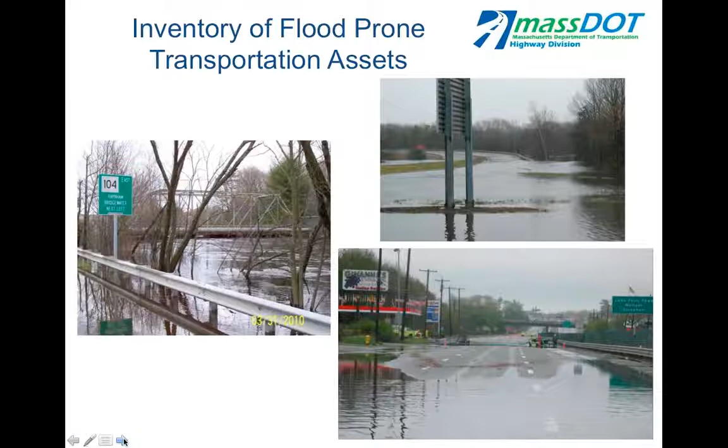So we felt like this was a good chance to look at - if it's flooding today, let's inventory it, it's likely it's going to flood tomorrow. So we started that process, and we did a series of surveys. We created the Inventory of Flood-Prone Transportation Assets. It took a number of surveys, and what we finally realized is we needed to go out and talk to people - everybody was too busy to really respond to these surveys in detail.

Actually, the surveys found that where the latest storms were, that's where we got the best results. So if the storm was in Eastern Mass, we got really good input from there. But this is something that, as a state agency, you can easily put together.

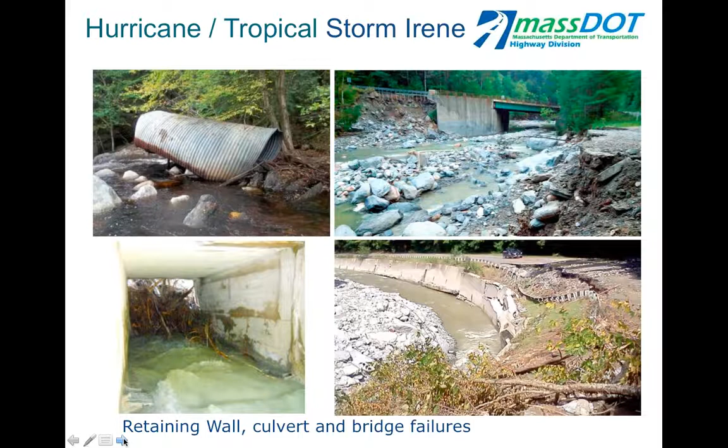When we were in the middle of that inventory, we were hit by Tropical Storm Irene, which found us in Western Mass. It very severely affected other states, especially Vermont, which had Hurricane Irene and Lee, but we were affected too, and our Route 2, a major east-west roadway, was completely taken out.

So we were in the middle of these surveys, we decided to go out again and talk to our folks in person, and we expanded our mapping to over 300 locations where there's a regular past history of flooding. Here's another shot of some of the damage from landslides.

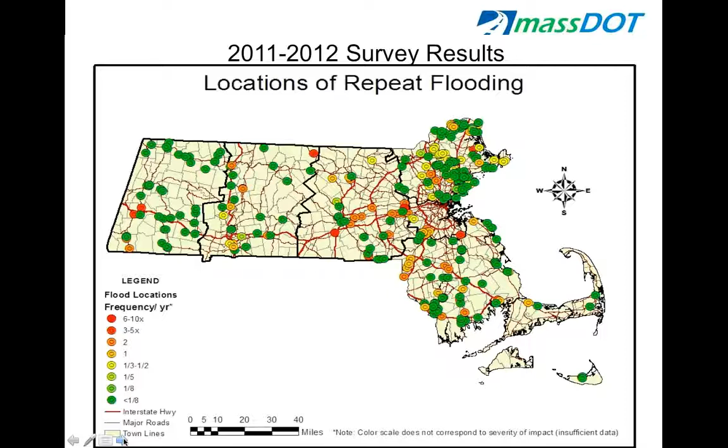This is the map we created. What's interesting is, one, by color coding, you can tell the number of times a structure or roadway floods in any given year. You can zoom in on this GIS layer, and when we went out to each district, we went over every single one of these points with all the maintenance, construction, and operations folks, and they knew every single location, how severe the flooding was, how frequent it was, how long it lasted, and in most cases, why it was flooding.

So it became a very good resource for us, and we now use that as we're screening projects with the approach that let's not miss any opportunities to make our system more resilient and minimize risk in the future. So let's make sure that if we are building a project, we're addressing the issue to the extent that we can.

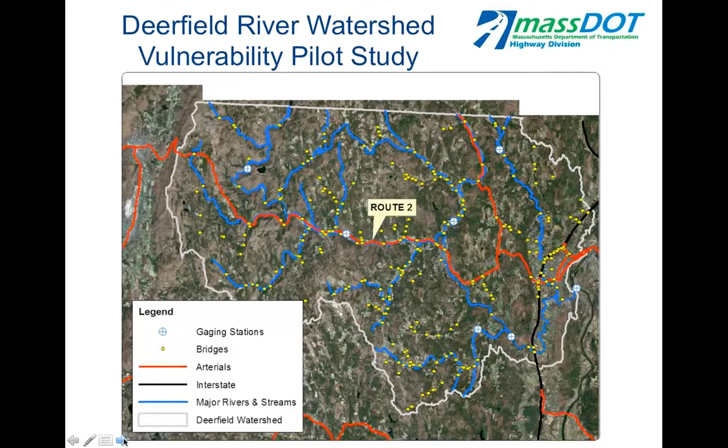The next project was the Deerfield River Watershed Vulnerability Pilot. We're about to start this. We've negotiated a contract, and we're going to develop a fluvial geomorphology model, essentially a model that will show the effects of a stream within the embankments and along the length of the watershed. So you're not just looking at one particular location, you're looking at multiple locations.

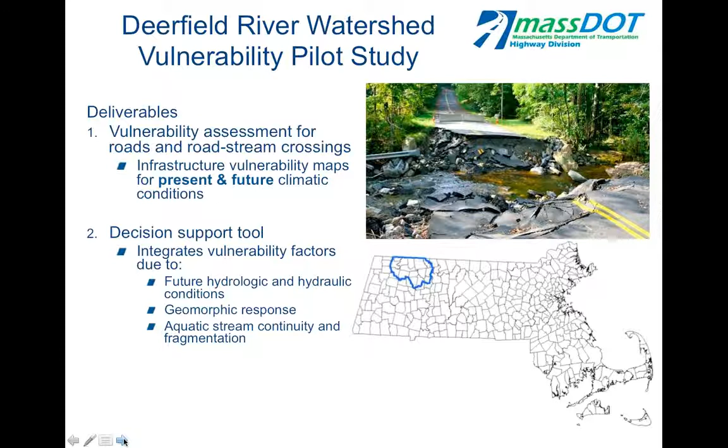Using that model, we'll be able to assess all those roadway and stream crossing locations, including climate change, into those predictions, and then assess them with this decision support tool. So you'll be able to tell, if we increase the size of this culvert, what effect will it have downstream and upstream? Is this a good investment? Is this something we should be doing? We're hoping to have that done in two years, and we're about to start that project.

And the final project I'm going to touch on today is our most sophisticated project, the MassDOT Federal Highway Pilot Project.

We were in the second round of pilot projects that Federal Highway funded. We're looking at climate change and extreme weather vulnerability to the Central Artery project. We spent a lot of money building the Central Artery. It's a critical resource to the city of Boston, and we want to make sure it's not vulnerable to extreme weather.

I've listed a few people here, including myself, but I want to point out Steve Miller is the project manager. He works in my section, and he's working with Catherine MacArthur as the assistant project manager. Our team is made up of the University of Massachusetts, including Ellen Douglas at UMass Boston, Paul Kirshen at University of New Hampshire, and Kirk Bosma from Woods Hole Group, who's doing all of the sophisticated modeling we're working on.

I like to show this picture because I like it better than a locus map, since it shows the area that used to be the Central Artery. The Central Artery is now underground, but this area right in the center, where there's some green space and roadways, that's parkland.

There used to be a big green, rusty, elevated structure there, a viaduct that went through the city. It was in gridlock a good part of the day. That's now gone. The I-93 has been moved below ground, which, as you can see here, also means it's below sea level.

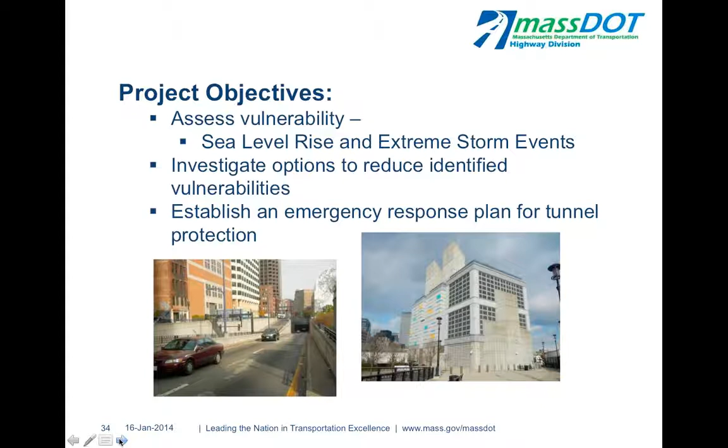The Central Artery is a critical link to the area, both the regional transportation network and to the city of Boston. It's an important economic engine, and it's a major emergency response route. By lowering this into the ground below sea level, it has revitalized the waterfront of Boston. It's been a huge economic boom, and it's an important resource.

Our project objectives were to assess the vulnerability of sea level rise and extreme storm events to the Central Artery, and look at ways we can reduce those risks and establish an emergency response plan for the tunnel, which might include, for instance, as a hurricane approaches, you might need to close down the tunnel a day in advance, as an example.

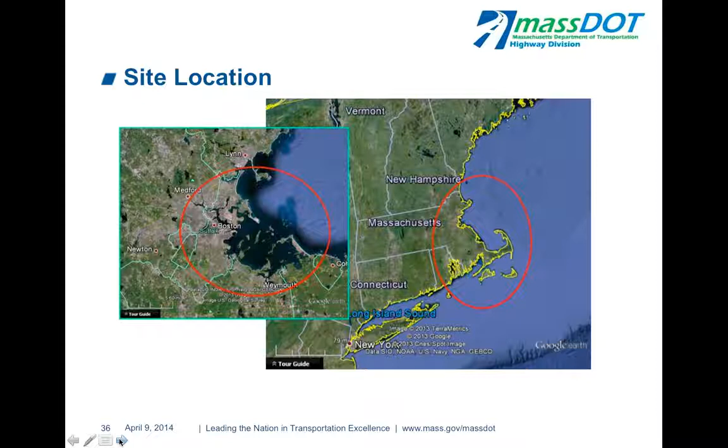We have an outside stakeholder committee made up of transportation agencies, our sister state agencies in the environment, FEMA, the federal and Massachusetts emergency management agencies, and the Boston Harbor Association, because in this case we were building upon a study that the Boston Harbor Association already had completed. It's important with these studies to have a technical advisory committee so you can validate the information and test your theories and make sure it passes with the experts in the field so you can depend on the results of the model.

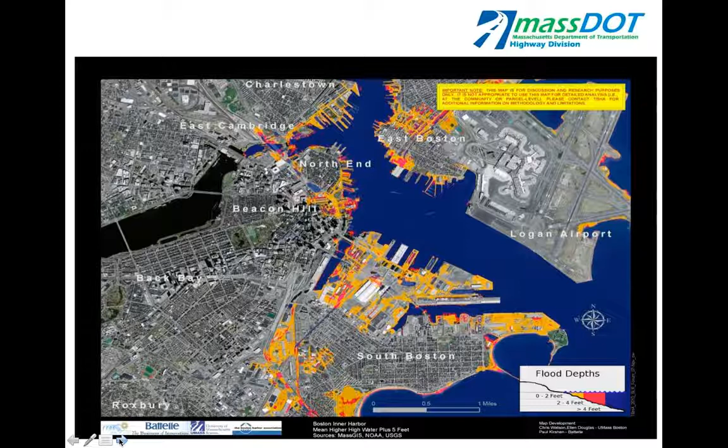Just for those of you who aren't familiar with Boston, that's a zoom in of the city of Boston where we're focused.

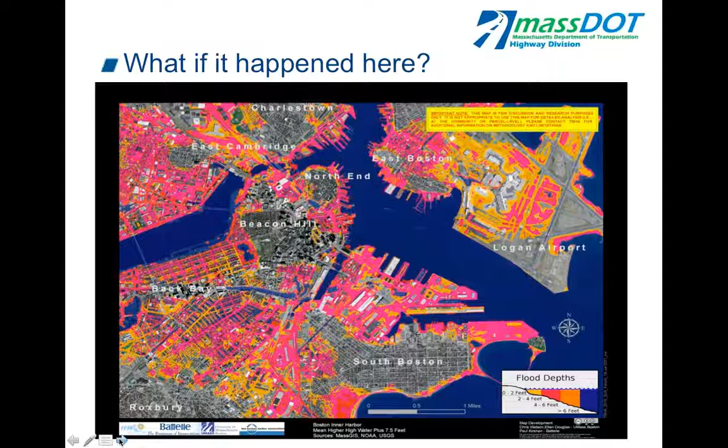This is where it all started. The Boston Harbor Association created this map. This is what we call a bathtub map. It's essentially taking existing sea level rise and layering 1 foot elevations on top of it. This represents about a 5 foot increase. This could happen today with a spring high tide and a 2.5 foot storm surge coming in. It represents some substantial flooding, similar actually to what we experienced in Hurricane Sandy.

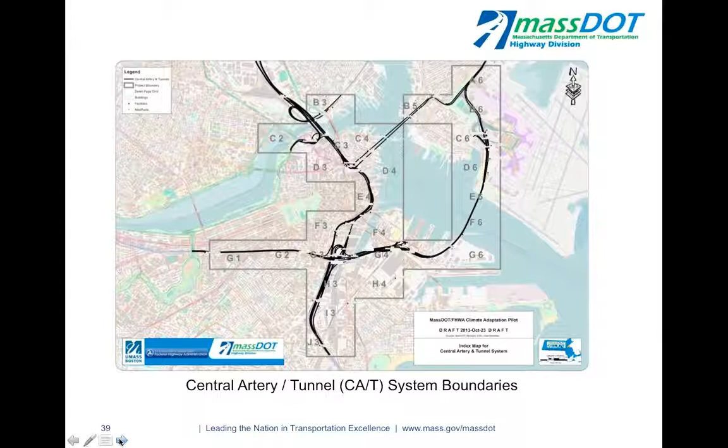This slide represents the shocker. This is what could happen if we had a direct hit from Hurricane Sandy. And keep in mind, this is from a bathtub effect, just a bathtub analysis. This is the slide I showed our highway administrator when he asked me the next day after Hurricane Sandy, what if it had hit 6 hours earlier, 6 hours later, or been as strong as when it landed in New York and New Jersey. I said, I've got these two slides, it's somewhere in between. We have a vulnerability pilot application in right now with Federal Highway to develop a model to look at this further. And that's where we are today.

So I'm just showing this to show you all the roadways that are underground that we're looking at. There are 3 tunnels underneath the Boston Harbor and the tunnels underneath the city of Boston.

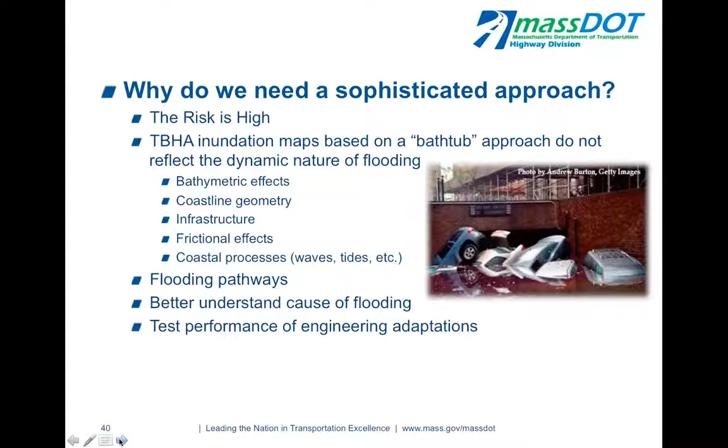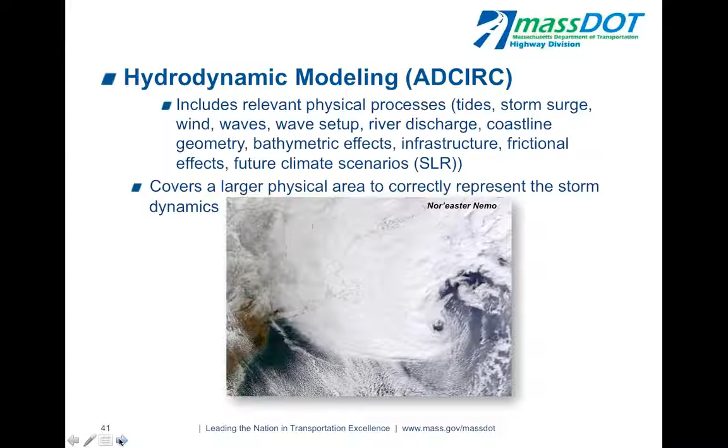So why do we need this sophisticated approach with this sophisticated model we're proceeding with? The risk is high, and it's an important resource, critical to the region. The Boston Harbor Association inundation maps were not really sophisticated. They were a great starting point and a great first approach, but they didn't include a lot of the effects of flooding, so you're not necessarily seeing the full extent or an accurate representation of all the areas that might face flooding. So we're going to build upon what they did and add the flooding pathways that will come out of this model. We're looking at wave effect, and we'll have a better understanding of the cause of flooding, and then most importantly, be able to test engineering adaptations and look at those based on the risk and the probability and see how far we want to go with any adaptation measures.

So this is the model that we use. It's called the ADCIRC model. Federal Highway used this on the Gulf Coast 2 study. We're building upon it here. As I mentioned, it includes waves, wave setup, river discharge. We have 3 rivers coming into the Boston Harbor. That's an important factor in considering any storm surge coming in. If those are at peak flow while we're at peak flood level while a storm comes in, the impacts would be much more severe. And it covers a large physical area because you have to look at a hurricane, it's a massive storm system. So it's the Gulf of Maine that we're looking at in the model.

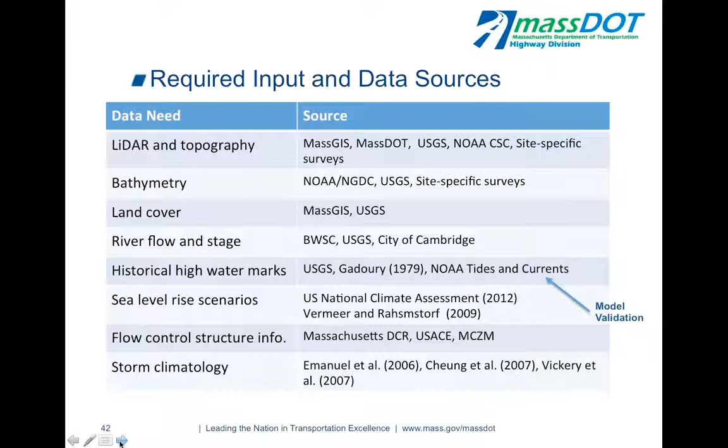There's a lot of data that's required. And what we've discovered with a lot of the vulnerability pilots for climate change, it takes a lot longer than you think it should when you start the project. There's a lot of data, and the data is not necessarily as complete as you would think.

The central artery is a new project. We have CAD drawings of that central artery, but they don't necessarily translate well into a single format for this purpose. We had LIDAR survey for the city of Boston, but there's a lot of interference in urban areas with LIDAR, so you still have to do a lot of ground truthing.

The other part on this slide for the data, what we're lucky about in this area is we do have good historical high tide marks and a lot of good information from the blizzard of '78 for flood levels, and we're using that to validate the model.

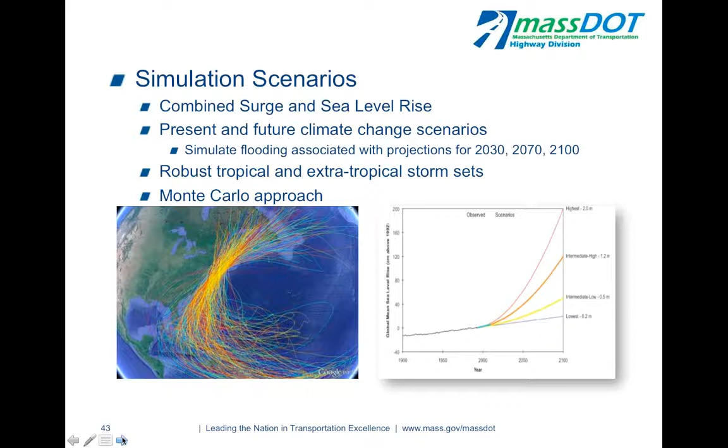So we're going to run a series of simulation scenarios using the Monte Carlo approach. Essentially, you're rolling the dice, throwing multiple thousand different potential paths of hurricanes and intensities and running them through. And that gives you, once you get through that, some probability, so you can start looking at the chance and the potential impact to your resources.

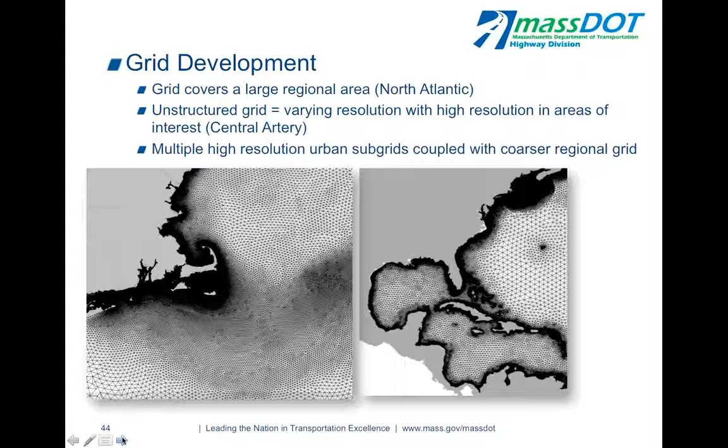We're going to run it for present and future climate change scenarios, looking out at 2030, 2070, and 2100. And we're going for not just tropical storms, the hurricanes, but this is the first time ever we're modeling nor'easters. That's the work that UMass and Woods Hole Group are working on.

But because of that, it's a very intense level of data. We're running the Monte Carlo approach at the UMass Boston supercomputers.

So in that model, we'll develop a grid system. Each one of these nodes represents a water elevation. As you get closer into your area, the grid becomes more unstructured, and you can pinpoint specific areas that you want to focus in on. It becomes a more dense grid as you get closer and more high resolution.

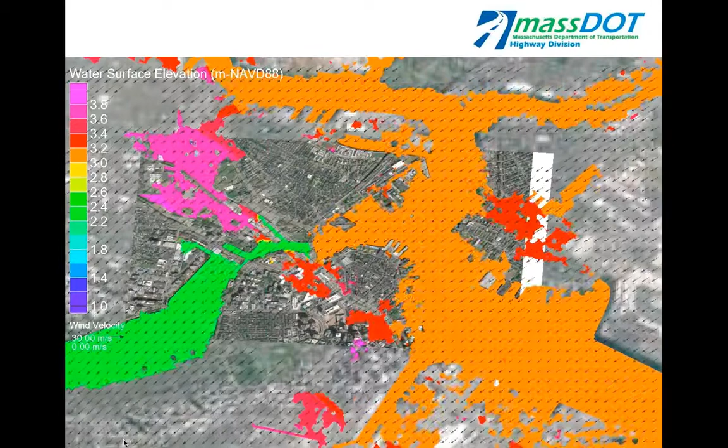So that represents the grid. What you're seeing there, the city of Boston with the grid overlaid on it. If you look in the central artery area, it's a much closer, tighter grid. That's where we're focusing on.

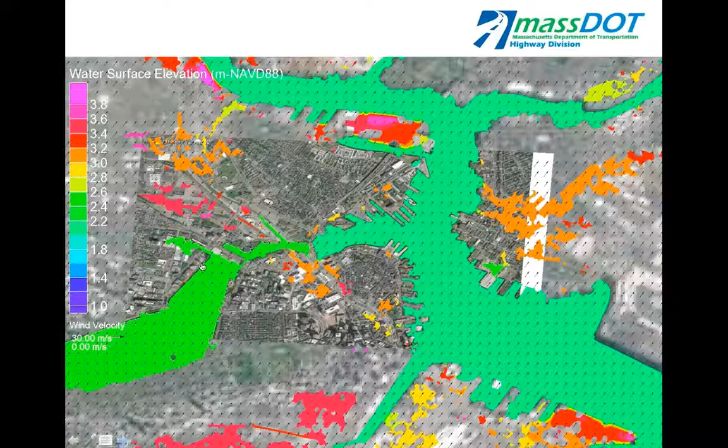So this next slide gets to a fun aspect of this model, being able to show you a quick simulation, if it works here. This is a validation run, ran through it pretty quickly. The type of data you get out of here, you start to see flood elevations on a time lapse. We ran this only for validation, it's not a final model, but it shows you the paths of flooding that might occur. So what we're doing now is going out to areas where it looks like there are some anomalies, and doing additional survey, because we realized the LiDAR survey might not have picked up something, or something strange is happening, and refining that data as we go forward.

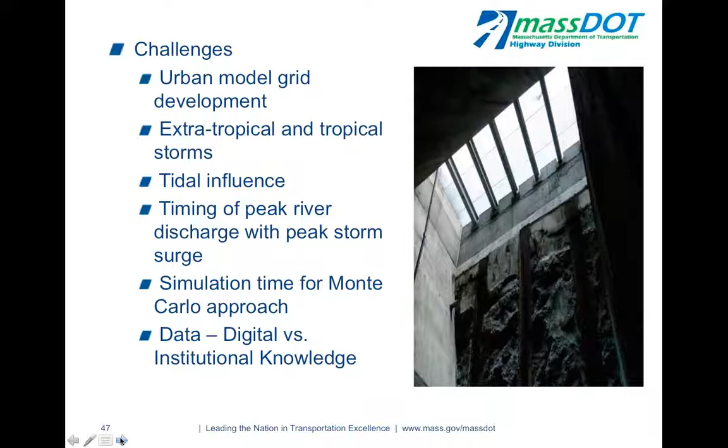So there's some challenges as we develop these models. A sophisticated model and the urban model grid development involves a lot of data points, and there's no quick and easy way to get it. LiDAR is a good place to start, but you still need to do a lot of ground truthing. Running both hurricanes and nor'easters, it's big data, and it requires a lot of computer power to run. There's a significant tidal influence in New England compared to other areas, about a 9-foot tidal influence. We have 3 rivers coming into this area, which makes it interesting. And I already mentioned the simulation time.

One thing I want to mention, the data again, digital versus institutional knowledge. When we went and talked to the guys that work in our tunnels, that run the HVAC, that run the plumbing, and make sure the tunnels are running every day, all our maintenance and operations people, they pointed out a number of areas that weren't picked up on LiDAR. What about the ventilation shaft that is at street level on Atlantic Ave, with a grate in the sidewalk? So if Atlantic Ave gets flooded, that's a possible area. So we got a lot of great information from the people that are working in the field that know the system inside and out.

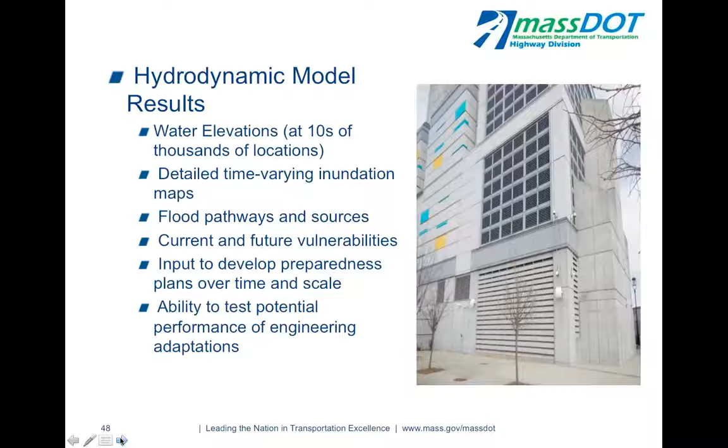Here's another example on the right-hand side, the picture. This is a vent building. Going down to the tunnels, you'll notice that the ventilation goes all the way down to the ground. So the vulnerability here is that if this is within the flood area, there's a doorway and then there's ventilation. We'll have to develop some kind of adaptation measure to put into place if flooding is going to come into this area. That is a vulnerable area.

With the hydrodynamic model, we'll have results of water elevations in very detail at tens of thousands of locations. We'll have detailed time-varying inundation maps based on the various climate change predictions and flood conditions in future years. We'll have flood pathways and sources. What I really like about this is the ability to test potential performance of engineering adaptations, to run it again and see how that adaptation measure will perform in the future.

Taking all this information from these three different studies, all of this is going to be incorporated into our GIS system, and we'll be able to use all of these potential risks and include it in our asset management plan as we're developing that.

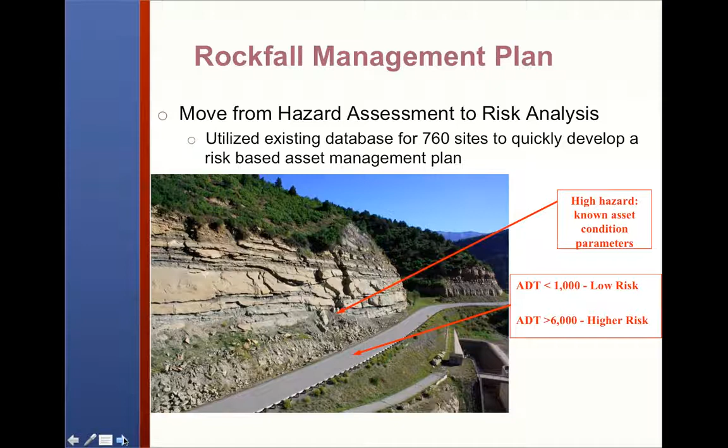The first of these is the Rockfall Management Plan, which was recently updated. The takeaway is that we were able to use a significant amount of data on 760 sites that have been tracked and measured for over 20 years, and we transitioned that data from more of a hazard assessment into a risk assessment.

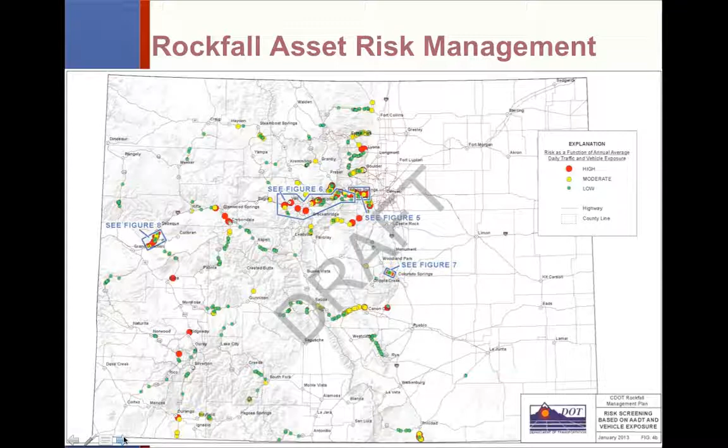This slide illustrates several high hazard rock sites. We know their conditions, but depending on the traffic, that is an influence into whether or not this might be classified as low risk or high risk.

From that analysis, this is a statewide view of the Rockfall asset plan. It illustrates the areas where these high-risk sites were identified, and a performance plan was put together to mitigate these sites and reduce the high risk they present to safety and mobility measures.

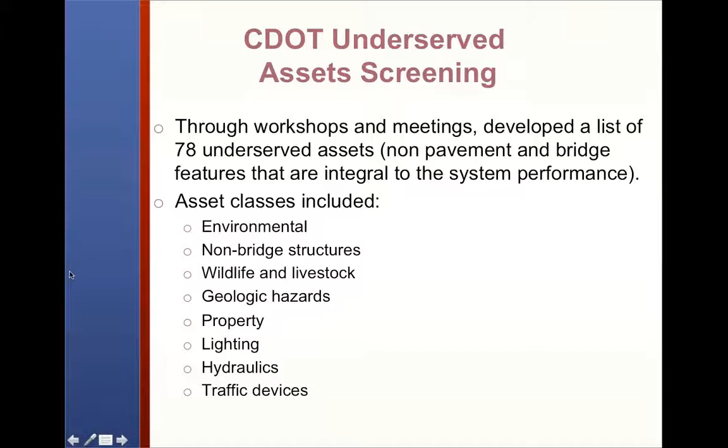The next project involved the underserved asset screening that CDOT did in support of their risk-based asset management plan last year. As part of the development of the risk register, a couple different workshops and meetings were held to identify a list of 78 underserved assets.

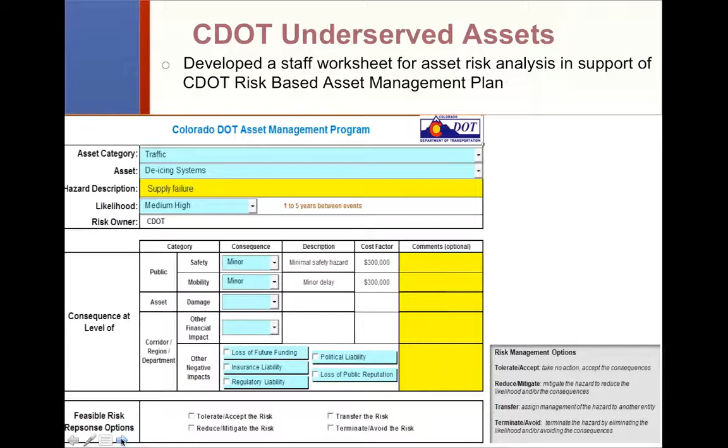Again, these were pretty much the non-pavement and non-bridge assets that are typically managed. The list includes environmental, non-bridge structures such as signs or culverts of smaller sizes, wildlife fencing, geologic hazards, property—all these different classes that present performance risk to the various performance areas we're interested in.

As part of this, a tool was created within CDOT—an in-house tool able to evaluate all these assets together using the same consequence and likelihood measures, so that we could essentially evaluate different assets against each other at a relatively high level, kind of at a system or program level.

That was used in a final workshop where a risk register was created, which also considered an event typically tied to those assets. We used experts within the department in a half-day workshop to go through and reach consensus on the likelihood and consequence scores, and ultimately that was used to build this risk register and identify those assets at different levels—whether project, program, or agency risk—and what their risk level was.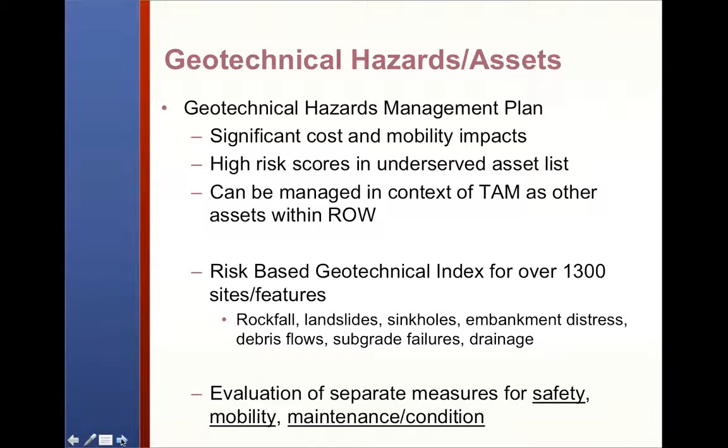Moving on with some of the other risk-based implementation—currently, the geotechnical hazards management plan is being developed, and here again we're focused on risk and the consequences that these geotechnical hazards or assets present to the department's performance aspects.

These were hazards such as landslides, rockfall, debris flows, and subgrade failures—features that have historically caused significant internal costs and mobility impacts. With the expert panel done for the risk-based asset management plan, those features were identified as generally presenting a high risk, and they can be managed within the context of a TAM plan, as many of these are assets within the right-of-way. But again, we're focused on evaluating these against performance measures related to safety, mobility, or maintenance.

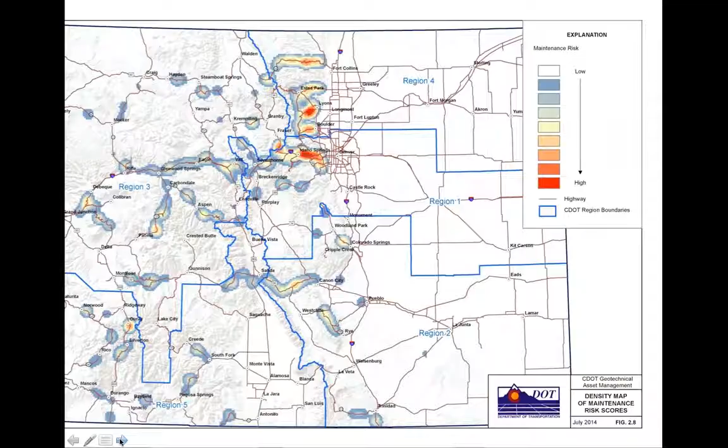This is just a different representation of this, similar data, only now it's being contoured into a risk density plot. This is a means to better identify areas of treatment potential when we want to obtain the highest level of risk reduction within the budget constraints. This also helps with identifying what we might call corridors.

So we're essentially aggregating multiple sites or multiple risks to better evaluate how we can, at a system level, better attain risk reduction. The red areas, and the other contoured areas as well, allow us to contour that density for a better management plan.

The last work here involves the wall asset management plan that CDOT is doing. This is for both retaining walls and sound walls. This work was begun at the end of last year and is ongoing right now. Initially, part of the goal was just determining what even existed in that inventory.

A rapid risk-based inventory was performed using online tools such as Google Earth and the CDOT GIS system with photo viewers. That allowed a lot of this work to be done in December and January, when traditionally you might not have been able to get out and view these sites due to weather. So it was a little more cost effective than driving folks around the state.

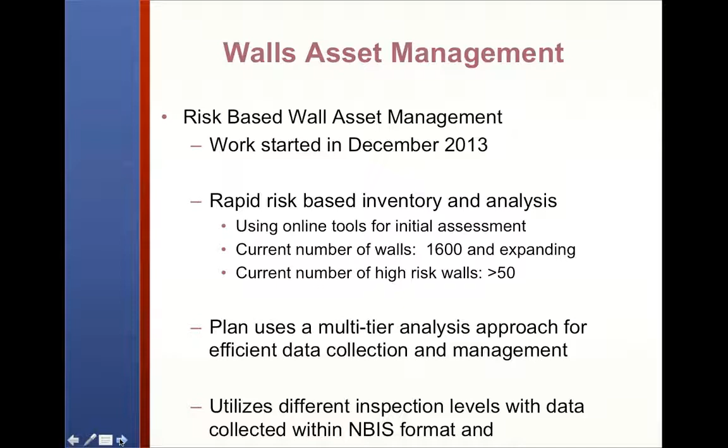In that higher level analysis, over 1,600 walls have been identified, and it continues to grow. Within that analysis, when we look at the consequence and likelihood of an adverse event with a wall, there are currently 50 walls identified.

Because of the number of assets here and the early stage in this, a multi-tiered analysis was performed: a first tier focused on all walls, and a second tier which focuses more on the medium and high risk. This work was also done to collect the data in a consistent format with NBIS and typical bridge inspection, using measures and inputs that are commonly already obtained.

As we go through this workflow, we're evaluating these walls for low and medium condition risk, and those walls with higher risk levels get an additional inspection level, so that we're not doing that rigorous level of inspection on all walls. It allows us to put together a more cost-effective plan.